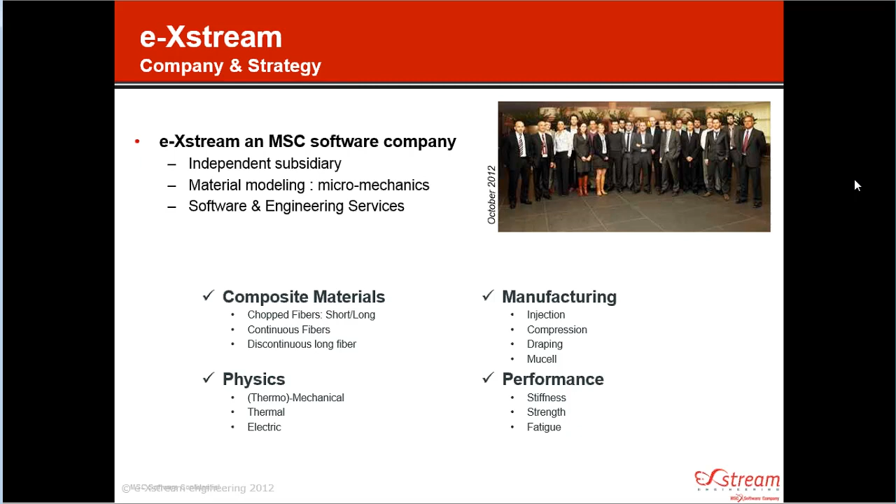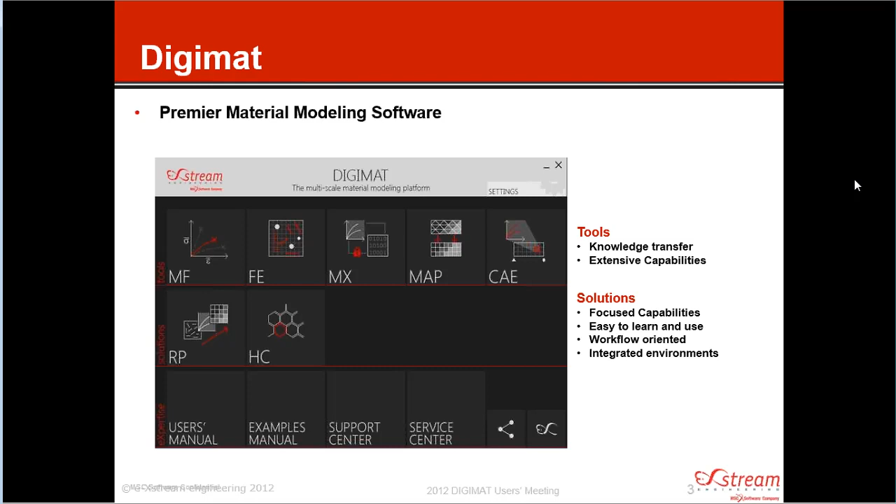And then in addition, now we've developed a couple of sets of vertical solutions, and we'll have more coming later this year, so stay tuned, and we'll talk about those as well. But those are really more focused around solving individual problems. They're more workflow-oriented with integrated environments to really get you a fast, robust, easy solution for the more specific and popular problems that our customers are solving.

So now we've talked about Digimat and a little bit of the motivation why our customers are using Digimat. So this is an excerpt from an article that was written by one of our customers over in the Ford Interiors group. And essentially the motivations to use Digimat are similar to the motivations that all of you started using CAE to begin with. And that's really that by using Digimat, you can design better parts, so lighter weight, 10 to 20% mass reduction compared to traditional finite element methods, which leads to more material cost reduction,

which also, by doing better analysis and more accurate analysis, you'd have less likelihood that you're going to have those late-stage surprises after the part has been tooled. That means you have to go back and do those costly late tooling changes. So it also reduces the risk in your overall design and release process. So that's a little about the motivations for why people are using Digimat.

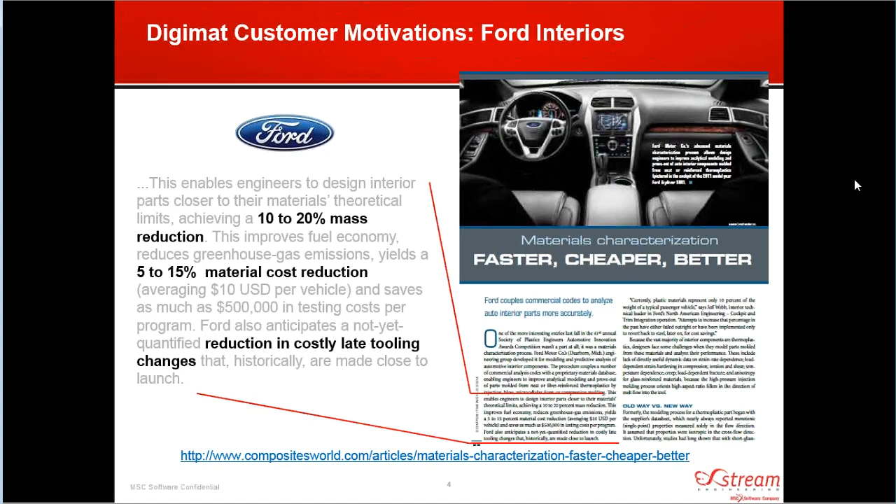And who are our customers that are then motivated to use Digimat? So we have a variety of customers across a number of different industries, from material suppliers who we typically have quite a close partnership with, into the automotive sector in both the OEMs and Tier 1s. We as well have a number of customers in a variety of different aerospace sectors, as well as electronics and electrical equipment. We also have a growing customer base in the medical device industry.

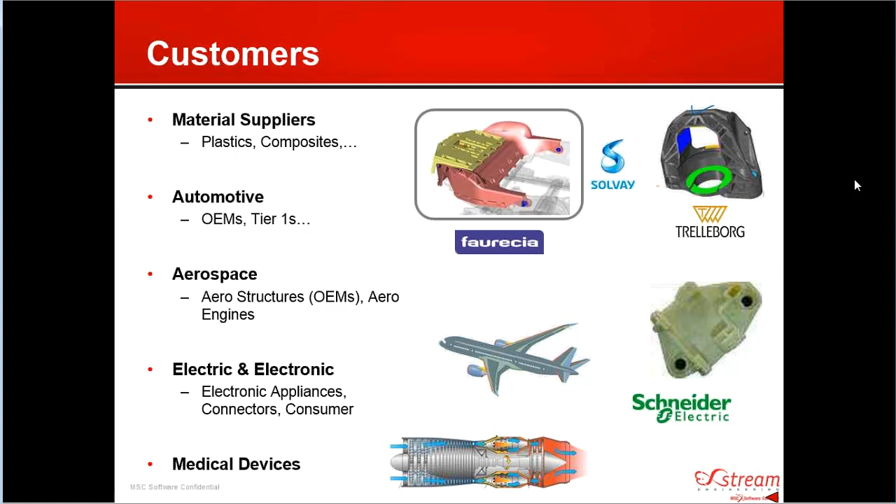So kind of a wide variety of customers solving a wide variety of problems, but with one common element amongst all of them, and the fact that they're dealing with composite materials, and a lot of them with the discontinuous fiber composites that we're going to talk more about here in a moment. So now that we've talked a little bit about who we are and what we do, let's talk a little bit about some background about modeling fiber-reinforced plastics or discontinuous composites, just to make sure that we're all on the same page here. And I apologize for any of you that this is a bit elementary for.

So if we start with the really most basic part we can think of, that part would be just a really simple flat plate. And if we were to take that part and we were to study a piece of material at the very center of that plate, the way that we might study that piece of material is that we could cut a couple of dumbbells where that piece of material is at the center of the dumbbell from the plate, and then we could test those dumbbells in a tensile testing machine. And what you would see is something like what I've got shown here.

So in the case where we test the material so that we're loading it in the flow direction of how the part was manufactured, we're going to see something like that gray curve there. So it's going to be very stiff in the beginning, and then it's going to fail at a relatively high stress, low strain, so a relatively brittle performance.

In the second scenario, where now we're going to load the material transverse to the direction of how that part was injection molded, so the flow direction during the injection molding, we're going to see a response that looks more similar to the red curve there, where the material is going to be less stiff in the beginning, and then it's going to go into plasticity much sooner. It's going to be much more ductile, so you're going to have a much higher strain and lower stress at failure. So very different material response for those two different loading scenarios. And really what we're seeing there is the effect of the local fiber orientation on the material.

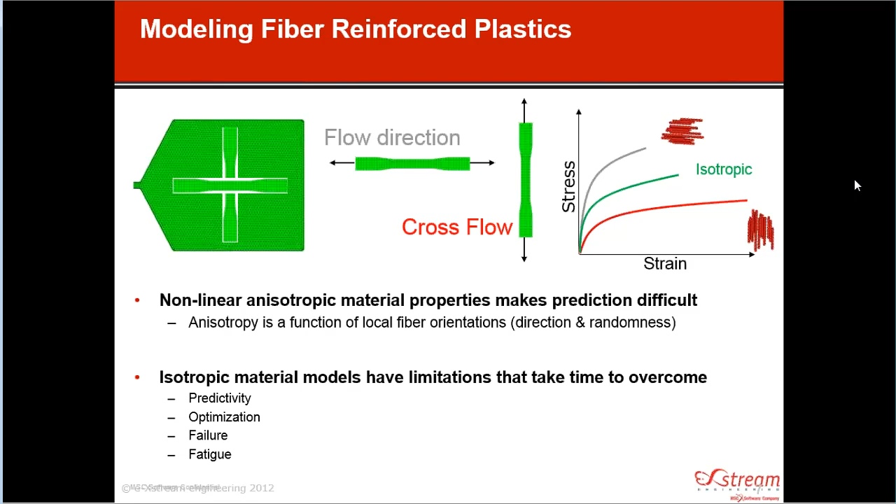So the way that Digimat handles that issue is using mean-field homogenization. And this is really the engine behind Digimat that allows us to be so accurate in our analysis of these discontinuous fiber composites. So what we do is we build our material models at a level below the traditional composite level that most people are modeling in finite element analysis. So we have a description in our material model. We have a description of the matrix, so a stress strain curve for the matrix, if you will. We have a description of the fibers, and then we have a description of the local microstructure.

And what that means is that we're going to have a description of what the fiber orientations are, how aligned they are, how random they are, in what direction. We're going to have a description of how long the fibers are, so the aspect ratio. And we're also going to have a description of how many fibers there are for how much plastic. So what's the volume fraction of fibers relative to the plastic. From there, we can homogenize all those different properties together to predict what the composite response is.

So we can go back to our input and we can vary that fiber orientation, and we can predict the composite response as you see in the top curve, where the fibers are very aligned in the direction of flow, so similar to the gray curve on the last slide, to the scenario in the bottom curve where the fibers are very transverse to the direction of loading, and then anywhere in between there, where you have randomly aligned fibers, or partially aligned fibers, or really a wide variety of scenarios.

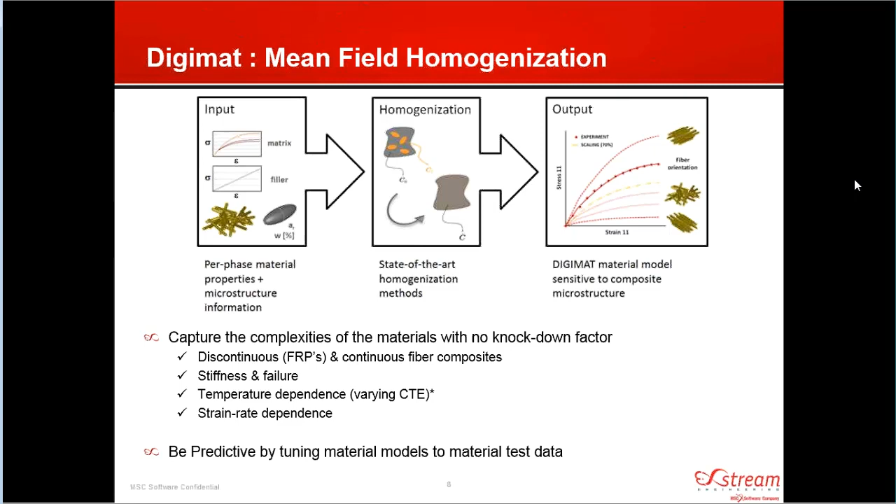At the end of the day, and I'll show this a little later in the presentation, we can take all this material and tune it to your material test data so that you can have a very accurate material model that then will allow you to be predictive at the part level. So instead of having to design your parts and go back and tune your knockdown factor, you can do it all up front and really predict how your part's going to perform even before you make it. So that's a little bit about the magic behind Digimat, if you will, or the science behind Digimat.

If we look at how Digimat works in a finite element analysis, it looks something like this. In the traditional finite element world, where people are working without a tool like Digimat, what they generally do is take some information coming from the material supplier. That could be a data sheet. It could be a stress strain curve. They then bring that information into their finite element analysis through a standard isotropic material card, maybe linear or nonlinear. And then they run their finite element analysis on that material and try to predict what the part performance is going to be.

At the same time, typically they have people working inside their group doing processing simulation. This could be compression molding, this could be injection molding. And they're trying to maximize the output on these parts, make them easier to manufacture, and reduce the warpage. But there's a lot of other information in that simulation that isn't being taken into consideration in the finite element analysis that's very valuable, namely the fiber orientations.

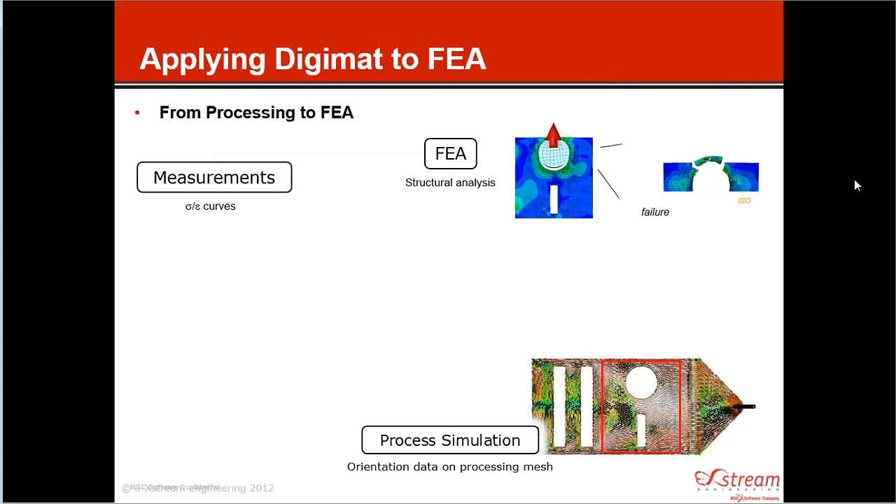So what Digimat allows you to do is take the information coming from your material supplier, so your stress strain curves. You can then build an advanced nonlinear anisotropic material model, one that takes into account the local fiber orientations. You can then take the information coming from your injection molding simulation and map that over to your structural analysis.

And this step is important because it means that you don't have to have the same mesh in your injection molding simulation as in your structural analysis. Typically you have very different mesh parameters in your injection molding simulation versus your structural analysis. So you can map that information over. You can then bring that all into your finite element analysis to get a more accurate prediction of how your part behaves.

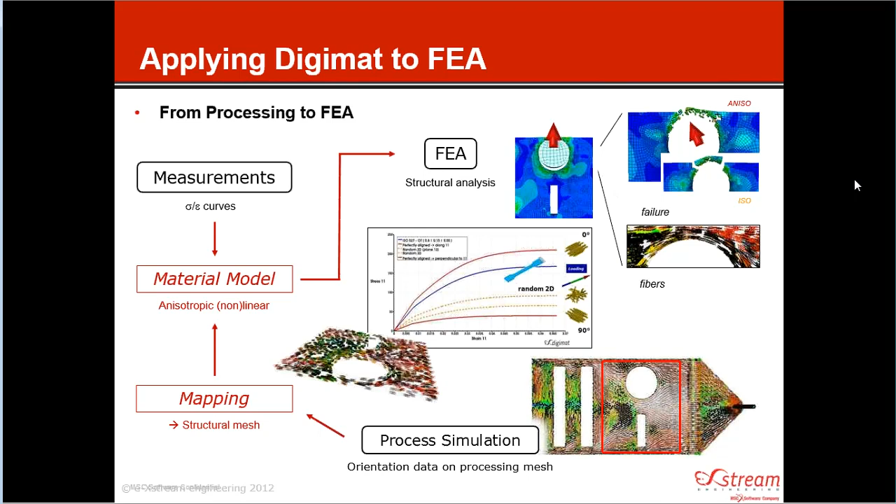So one of the most important things about this approach is that it allows you to take things like weld lines automatically into consideration. In the areas where you have these weld lines, you'll have these little balls of randomly aligned fibers from the two flow fronts meeting, and in those areas you'll see the reduction in stiffness and reduction in strength that typically comes along with a weld line.

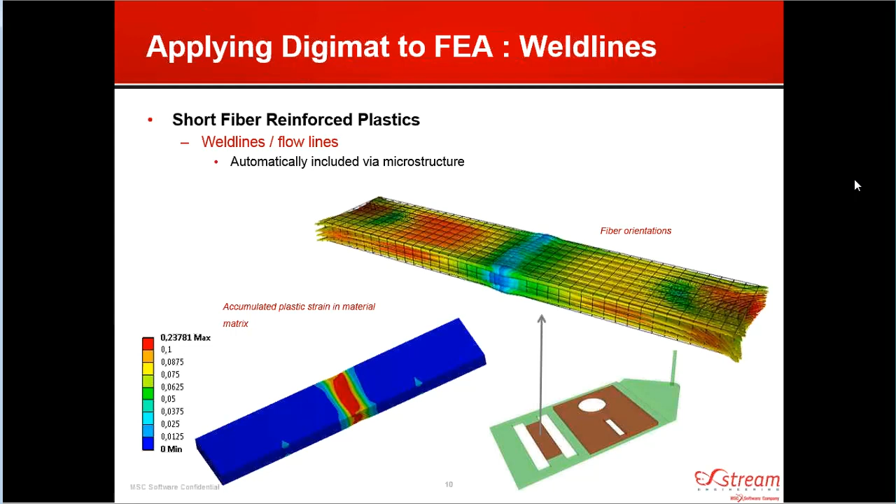All of this work can be done inside of one of those vertical solutions that I mentioned before. That vertical solution is called Digimat-RP. It stands for Digimat Reinforced Plastics, and it's really a very fast and easy way for our customers to be able to work within one GUI interface in order to do all of the different tasks that they need in order to bring a Digimat material into their finite element analysis.

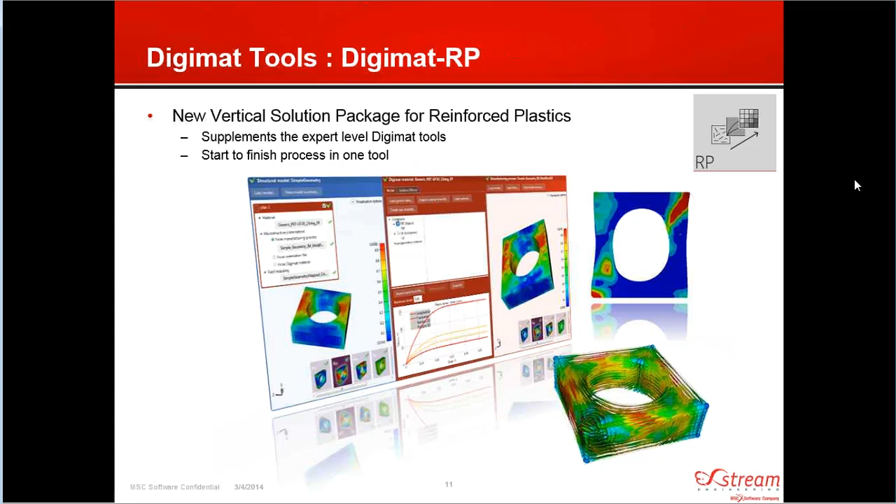For any of you who've had experience with Digimat before, this is a brand new product for us, and I think something that's very interesting for increasing the productivity for our customers using Digimat. So just a quick case study here, and then we'll talk a little bit more about how the technology can work with Nastran, and then get into another case study to finish things off.

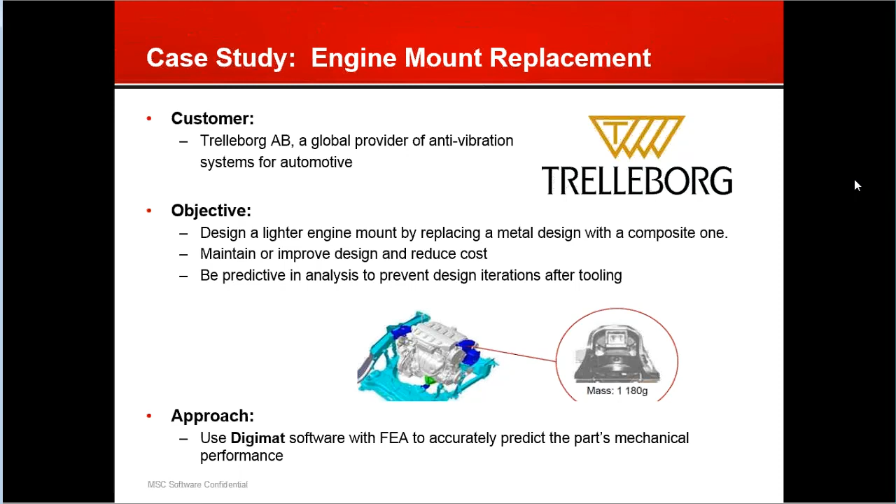So this is a case study done with Trelleborg. They're a vibration solution manufacturer, amongst other things. What they were trying to do was to replace a steel engine mount bracket with a fiber reinforced plastic material in order to reduce the cost and reduce the weight. And they decided to use Digimat in that design process in order to more accurately predict how the part was going to perform so that they could design a better and lighter part.

The material they chose for that analysis is a PA66 nylon reinforced with glass fibers. And you can see from the chart below that this is quite a complex material to deal with. From the three different groups of curves, you see that the material has a variety of stiffnesses and strengths depending on what the local fiber orientation is.

In addition, you can see inside each one of those groups that the faster you pull on that material, the more stiff it's going to behave, which means that it has a strain rate dependence. So this is a relatively complex material to deal with, and so they decided to use Digimat in the design process in order to take all of those things into consideration at once.

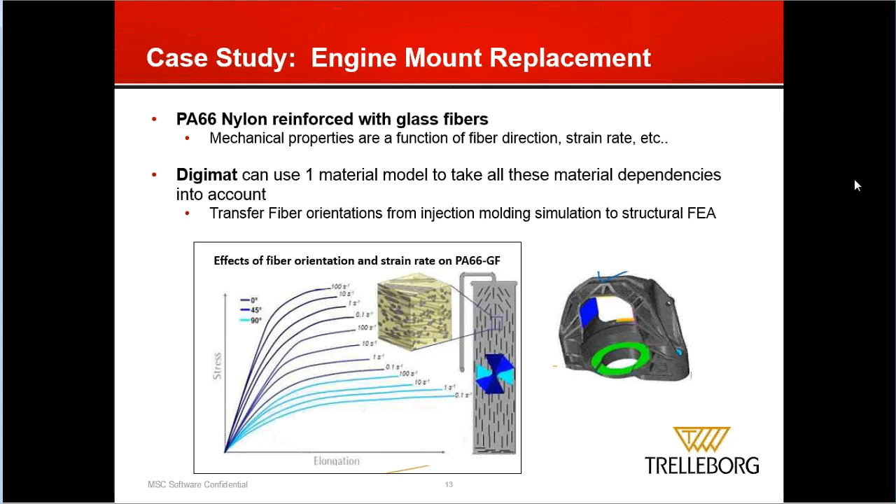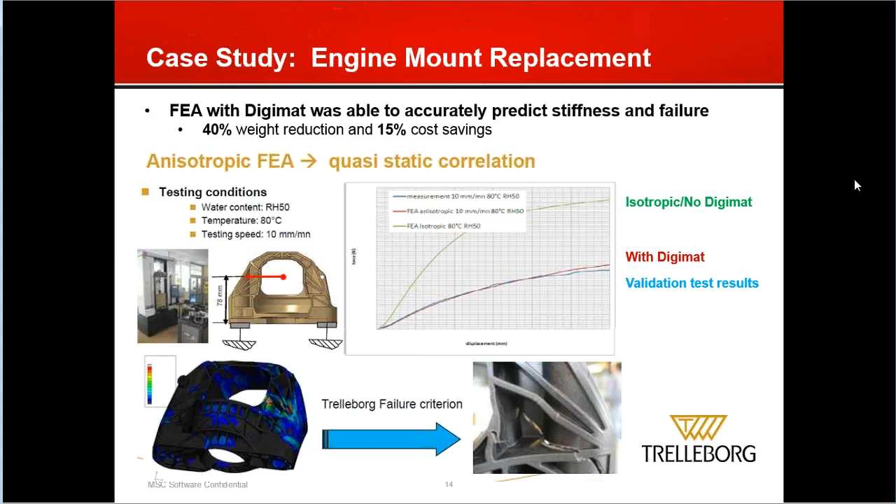And while the stiffness may have been approachable with an isotropic model, predicting where and when the failure would occur is something that is extremely difficult with an isotropic approach, and someplace where Digimat really has a lot of added value. So that's a little more of a demonstration about why people are using Digimat.

So let's talk a little bit more about what the Digimat process looks like and how you might go about adding one of these Digimat material models to your analysis. I showed you the workflow for how Digimat fits into the finite element analysis, but a common question from people new to Digimat is, where do I get this type of a material model from? We've got two different places that you can get your material model from.

The first one is from our Digimat-MX database. With the installation of Digimat, you get access to this material database, which is not just a database, as we'll get into in a second, and in that database we have 112 different material grades with a variety of different matrix types, so everything from your different nylons to polypropylene, PBT, PEEK, polyoxymethylene, as well as glass and carbon fiber composites.

And one of the neatest things inside here is that a variety of these material models are coming from a bunch of our different material supplier partners, so some of the main players in this industry. But in addition, we also have this Digimat generic material model database. And that generic material model database, along with the material models from the suppliers' grades, gives you the ability to take these material models out of Digimat-MX and be up and running with the Digimat material very quickly and

very easily. This is going to give you a big increase in the accuracy of results, even if you're using one of our generic material models, because you're going to really capture that first order effect of the local fiber orientation. So you're going to be able to very quickly increase the accuracy of your analysis relative to your isotropic approach. And this is going to work quite well for stiffness.

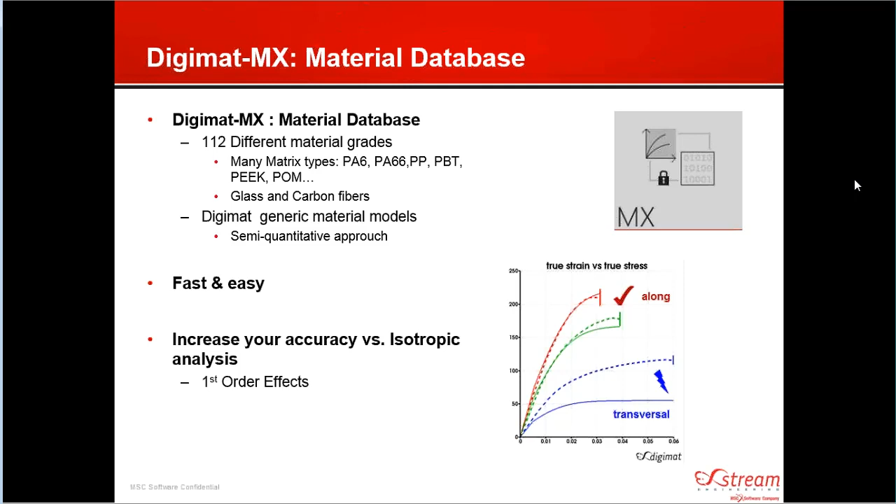But if you want to increase the accuracy a little bit further and you want to start to capture things like failure, or you want to really bring that accuracy level down to the 3 to 5% that we like to see with metal parts in a finite element analysis, then you need to use our more detailed or quantitative approach. And in that approach, you can take one of those generic material models, pull it out of the database, bring your test data coming from either your material supplier or maybe material testing done on your own, and bring that inside of Digimat-MX, and in there we have an automatic reverse engineering tool that will tune your Digimat material model to more closely match your test data.

In addition, you can also tune one of our custom failure indicators in there to be able to predict the failure response of your material. So in that way, you can take this material model and tune it to your exact test data, so you have a material model that matches your exact formulation of composite material, stiffness, and failure. And this will allow you to be predictive when you bring your analysis to the part level.

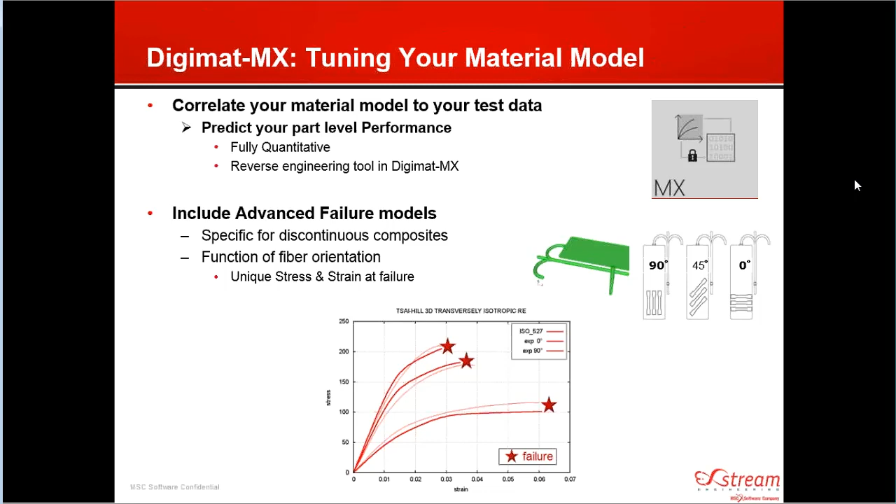So here's another case study example. This is a case study done with Schneider Electric on an electrical bracket that they were looking at manufacturing with a glass-filled PBT. So what you see here is a couple of different curves. You've got the red curve, which is their test results for one loading scenario. You've got the black curve, which was their isotropic approach that they were using before Digimat, so really not giving a very accurate picture of stiffness at all.

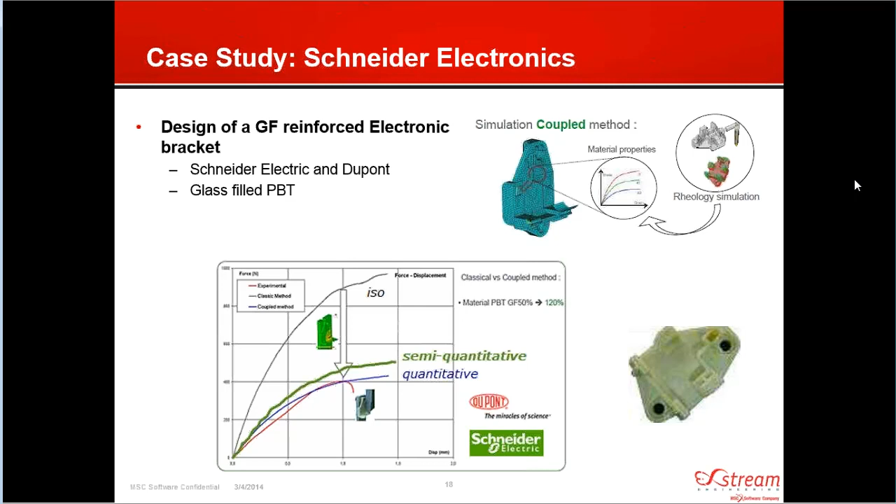And then you've got your two other approaches, which are labeled here as the semi-quantitative and quantitative approach. And what you see is that the semi-quantitative approach gives them a big increase in accuracy right away by taking into account those local fiber orientations, and that's really pulling the material model right from the database. And then the quantitative approach is going to bring them even closer, to a much higher level of accuracy, by tuning that material model to some material test data that they had before this analysis.

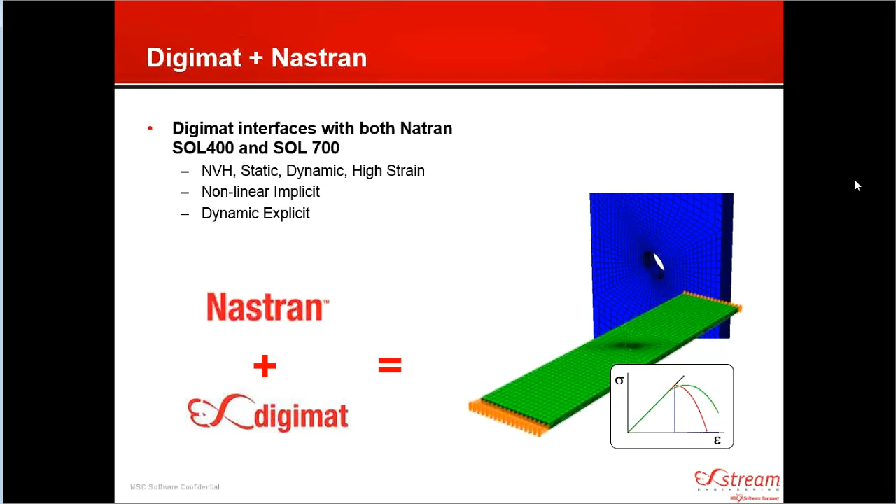So just a couple more comments about using Digimat with Nastran, and then we'll wrap things up with one more case study that really talks about using Digimat for an impact analysis and predicting failure. So currently, Digimat interfaces with both Nastran Solution 400 and Solution 700. So that allows you to do things like NVH analysis, static analysis, dynamic, high strain rate, or impact problems. We can handle both nonlinear implicit as well as dynamic explicit analysis.

And a couple notes about those Nastran solutions for some of our customers out there who are maybe more familiar with the classic Nastran solution. So Nastran Solution 400 is MSC's newest linear and nonlinear Nastran solution. It has comparable solutions to the Nastran 100 solution sequences, so it meets a wide variety of needs. You can capture all your Solution 100 sequences that you're used to using, as well as take into account a wide variety of different nonlinearities, such as material nonlinearity, looking at elastic, elastoplastic, hyperelastic, composite materials, time dependence, plasticity, and failure analysis.

You can look at large deformations and strains, take contact into consideration, and do multi-physics problems inside of Nastran Solution 400. So it's really a very capable solution that gives you a wide variety of different problems that you can solve. And one of the big advantages of it is that it interfaces with Digimat, or big advantages in this topic that we're discussing here.

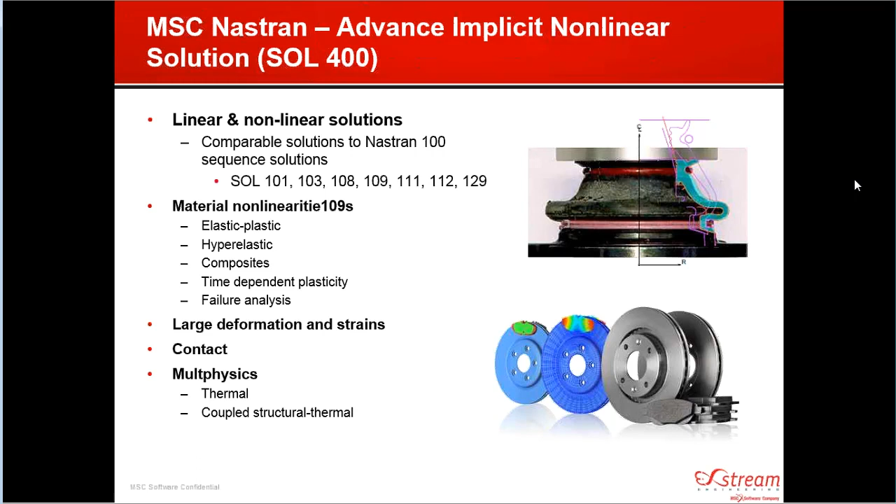In addition to interfacing with Nastran Solution 400, we also interface with Nastran Solution 700. Solution 700 is Nastran's transient dynamic solution for high-speed events, so really an explicit solver aimed at modeling high-speed dynamic crash events and other dynamic events happening inside the variety of industries we work with. We can look at both structural as well as fluid structural interaction, and there's a lot of variety for ways that you can tune this solver to match your specific problems.

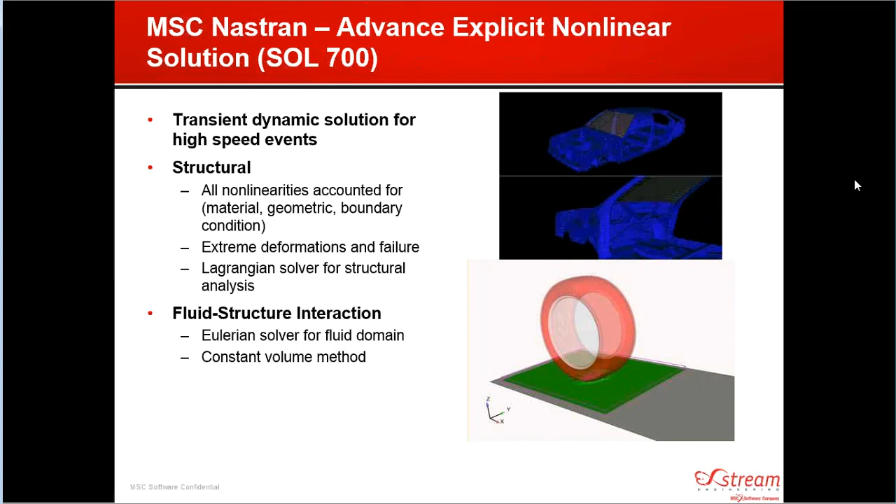So in that way, by using Digimat with Nastran, we have two different solution types that work well with Digimat that can solve just about any problem that you're looking to solve in the finite element world. So a case study to demonstrate how that might work, or what kind of accuracy you can expect out of Solution 400 for our Solution 100 users out there.

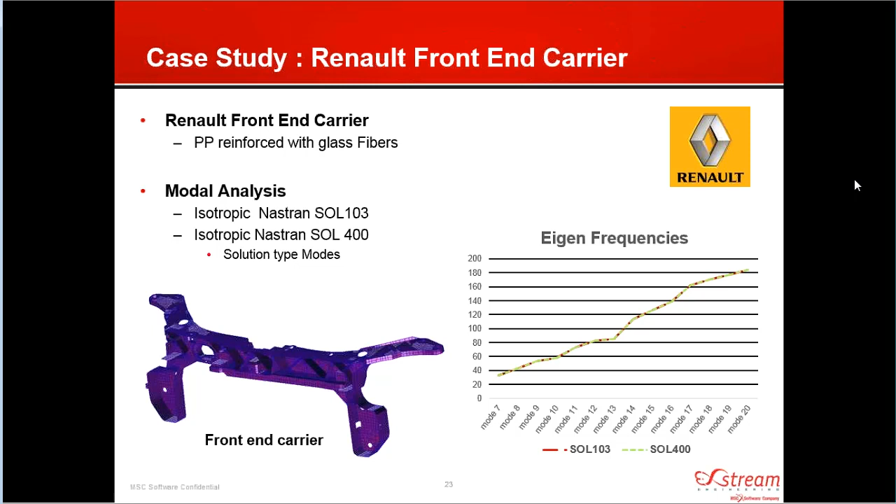This is a short case study we did with a Renault front-end carrier, which is polypropylene reinforced with glass fibers. In this case, in the first step, we wanted to compare Solution 103 to Solution 400. So really looking at a modal analysis just to make sure that as we move it from one solution type to the next solution type, we can still expect the same level of accuracy and the same type of results we did with our 100 solution that's really been our legacy solution. So you can see here from the chart on the right that we see a good correlation between the various eigenmodes for these two different solution types.

And in addition, when we add Digimat into Nastran Solution 400 and we take into account that variety of local fiber orientations, we see an increase in the accuracy of the modal analysis. So we start to see that those modal frequencies shift. The part is actually a little softer than we expected because now we have these areas of randomly aligned fibers, and you get a more accurate solution using Digimat plus Solution 400 relative to the traditional 103 approach.

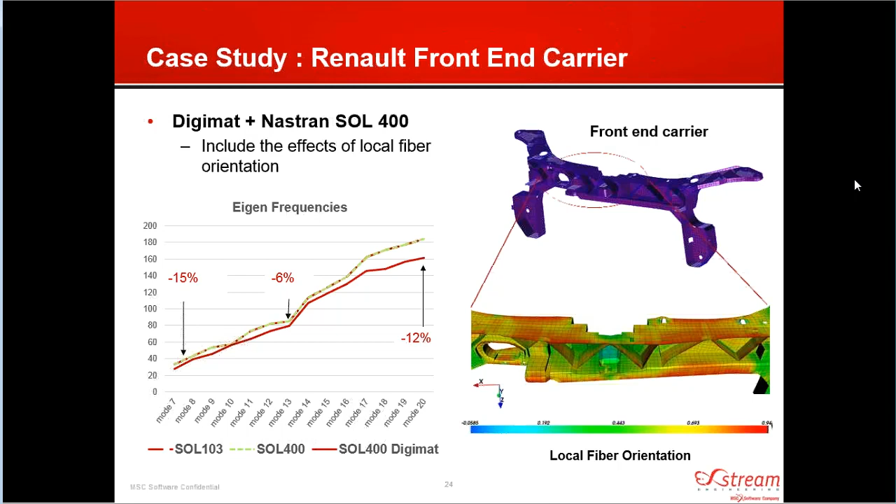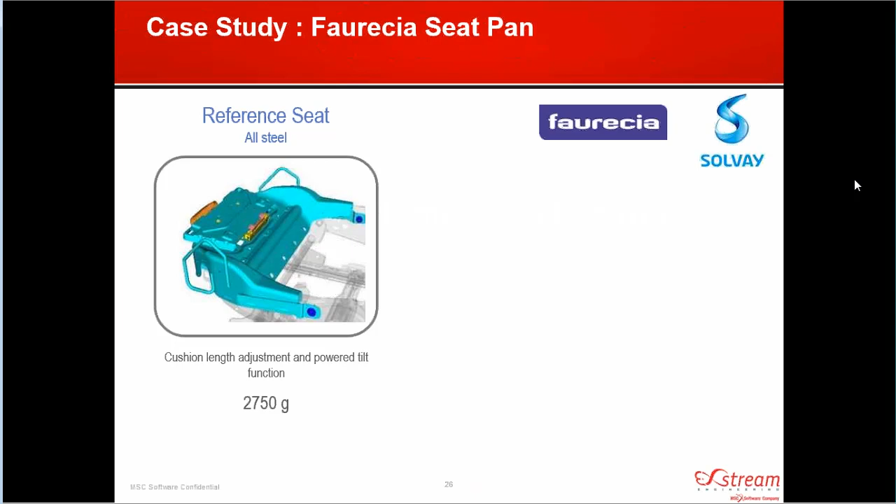So one more case study here, and then I'm going to wrap things up and then open up for questions. So this case study is a metal to plastic design comparison, really looking at stiffness and failure prediction for an impact scenario. So in this case, the case study was done by Faurecia with Solvay. Solvay is one of our material supplier partners, and they were trying to take a reference seat, which was made from all steel, and convert that into a nylon reinforced with 30% glass fiber seat pan.

Using Digimat in the design process, they were able to get a 50% reduction in the number of parts and a 40% reduction in the overall weight with the same functionality, going from the steel seat pan over to the nylon reinforced with glass fiber seat pan.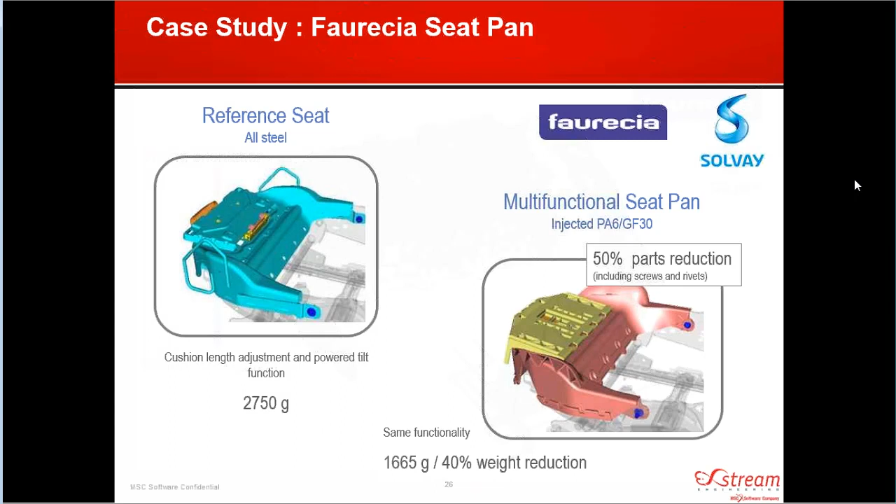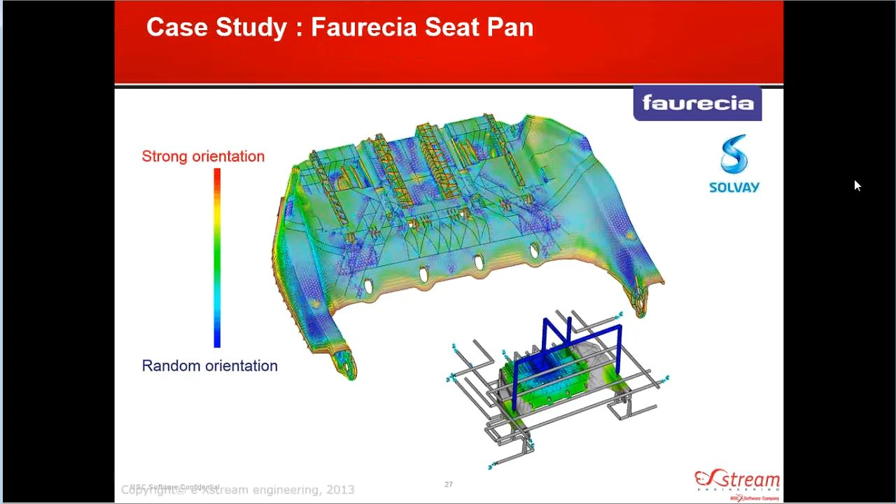What we're going to do is we're going to compare a couple of different analysis approaches at 3 different time steps right before some major failure events in the material. So in the first case, we'll look just before you had a rib buckling. That rib buckling then leads to a rib failure, and then a final failure evolution that causes the ultimate failure of the part.

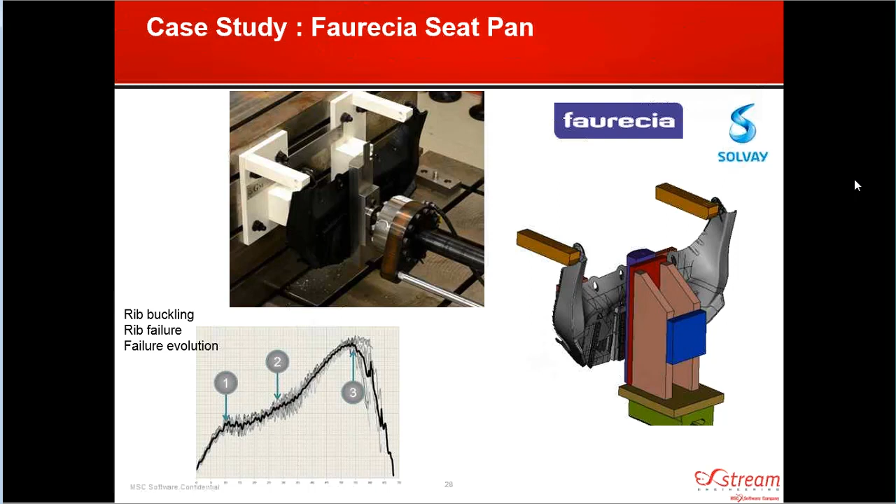So in the first scenario, your loading has really just started to happen, just before we have that stiffness reduction. In the first case with the ISO 527, your very stiff isotropic material model, you have a failure that happens too early, in the wrong place, in the wrong direction. For the scaled approach, you don't have that failure, and in the Digimat scenario, you don't have that failure.

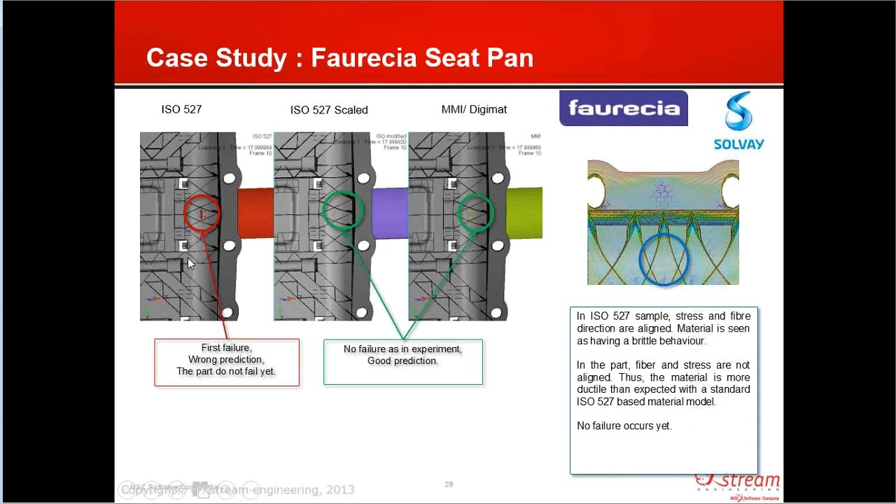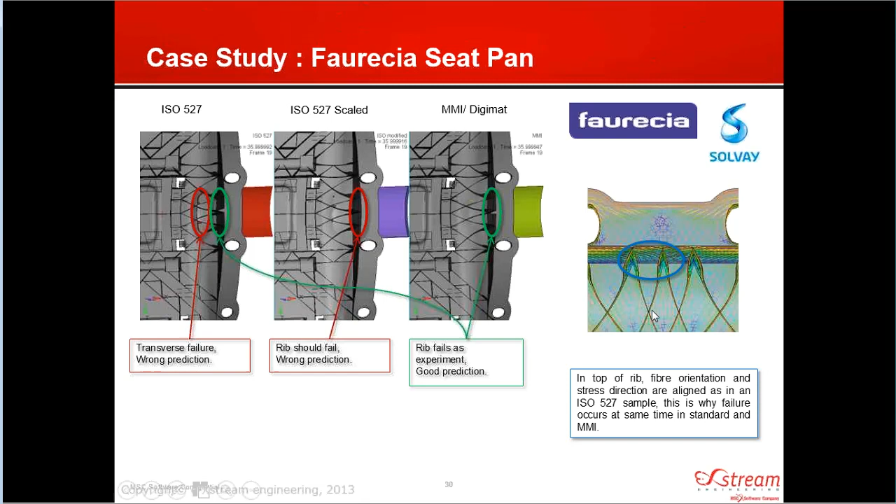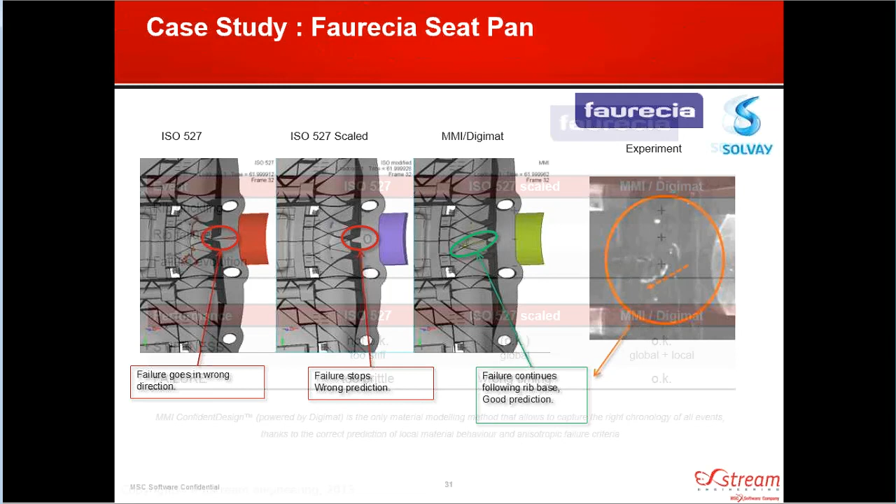So at the end of the day, if you compare Digimat to the 2 different isotropic approaches, it's the only one that was able to capture all of the different failure events. In addition, it's the only one that's going to give you an accurate prediction of how the part's going to perform for both stiffness and for failure.